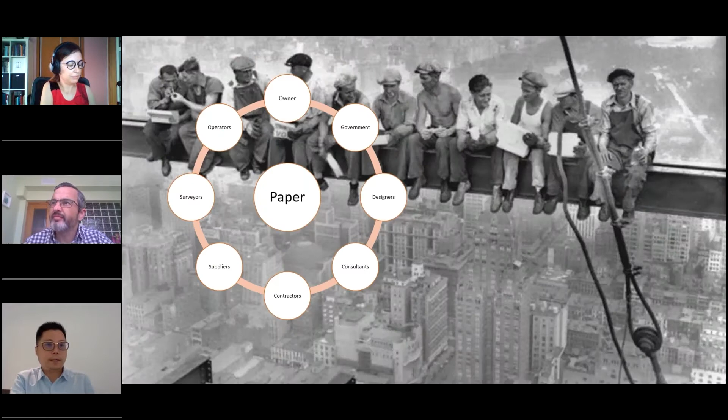This is Wilson from ISBIM, I'm also the BD manager. In the past, in our industry, we also used paper to do everything. So paper caused some projects to be late, with tight schedules and other issues. This problem has persisted for many years.

Now, in these few centuries, the building and construction industry already passed 1.0, and now it's moving towards 4.0, which means everything should be more automated, digitized, and driven by big data. Like other countries, they also do the same things. You can see the chart, many countries already do some BIM jobs, and in Hong Kong the government also encourages BIM for the industry, with workshops for BIM applications.

So for ISBIM, we were established in 2010. We mainly do BIM modeling and consultancy. In 2017, we had an investor, Qcheng Holdings, and also LWK Partners, an architect firm ranked 31st in the world.

In 2018 to 21, we also had some new companies join us. Some drivers developed digital platforms themselves, some work on BIM library, and some on software solutions and RFID, and so on. Our company has many offices around the world and in the Asia Pacific area. We built about 1,000 jobs in the last 10 years, and we have about 30 staff in Hong Kong and worldwide.

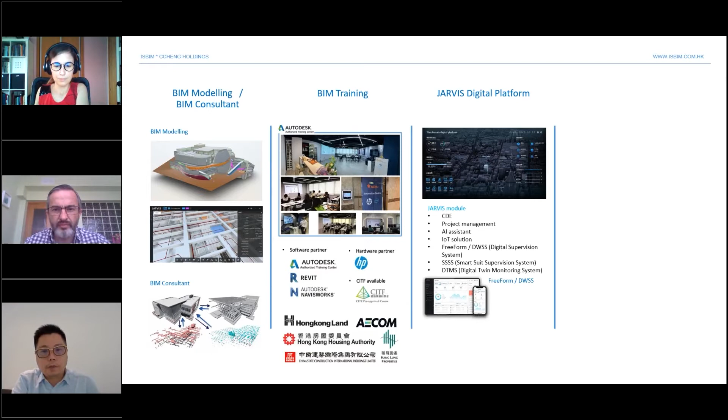It's mainly stuck for some projects like this. This is our platform, and we also have CDE and some applications for others like FreeForm systems and digital twin monitoring systems. Last year, we started to have some robotic solutions, and this application, we also have some robots in the CIC council.

These are some iconic BIM products from our side, you can see some iconic buildings in Hong Kong. We have clients including developers, contractors, subcontractors, and architects. We are also a reseller, besides Autodesk, we are now a reseller for CYPE as well.

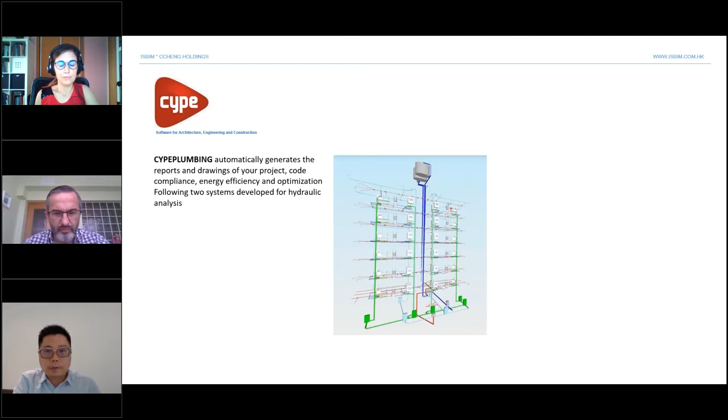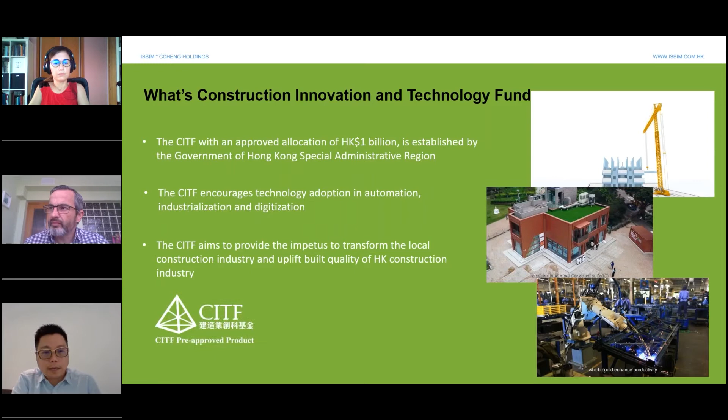The good news, as we informed before, is that if we successfully apply for the CITF funding, applicants can enjoy more benefits. Everybody knows that for CITF, the government encourages industrial technologies with 1 billion in funding. So applicants simply apply, and then they can enjoy the products and also training, with 2 sessions for funding. For the software, the ceiling is about 70% claimable from the CITF fund.

And now for the next step, besides this plumbing system, CYPE also has CYPECAD, which is like Revit, but with 3D capabilities too. It's much better. Next time you can enjoy it, as we are in the process of launching it.

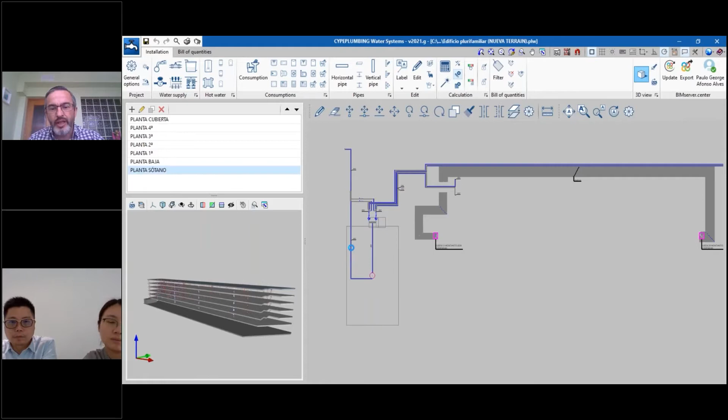Okay, so the program is based on IFC standards, so we can import IFCs from the architecture model from other programs. I see that you are seeing now. Okay, we can, like I was telling, we can import models from IFC Builder, CYPE Architecture.

There are modelers in BIM solutions, and we can establish here the hydraulic systems, like the pumps that we have, the pipes for all the floors, and we can do all the dimensioning using hydraulic calculations, applying standards.

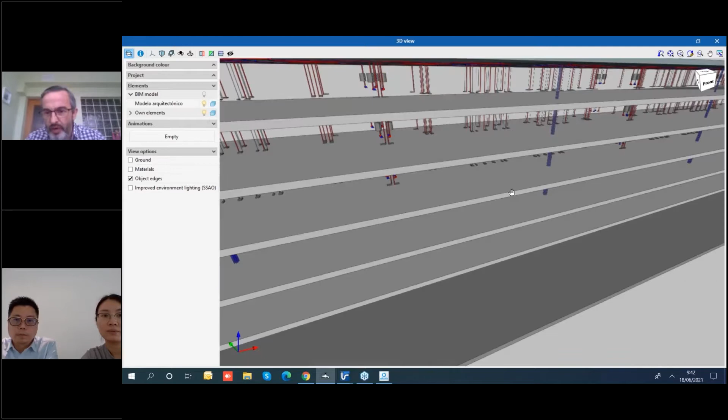In approximately 1 hour, we can see it live, doing a small installation, so you can see live how this works. Okay, so this is water supply. For instance, we can analyze in a quick way the parameters of these installations, and in these big installations we can see if we are making some kind of mistakes.

Okay, let me put here. The program will advise you, will guide you with errors, with warnings, so you can see if you are making some kind of mistakes, to establish a minimum quality that you have to provide to the installation.

The quality, what I mean by quality, is the minimum pressure on the consumptions, velocity, not using higher velocities than the standard indicates. So at every point, the program will advise you, will warn you that we are establishing some kind of problems.

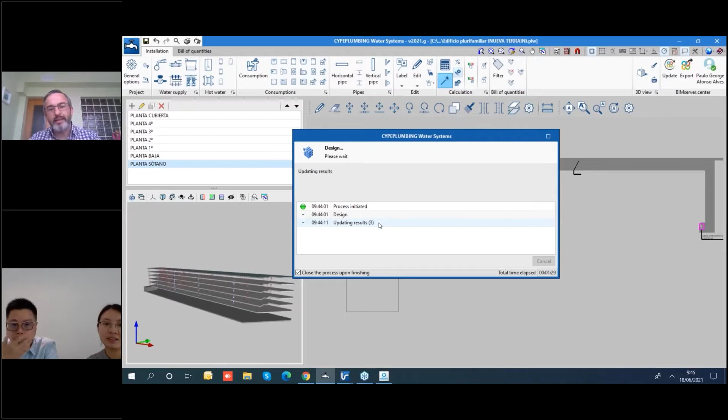So let's see, it's taking a little bit because the program in this case is using iterative calculations. The program will provide the least pressure needed for the pumps. For instance, the program can use a minimum available pressure requirement, minimum diameter. You can establish many kinds of parameters, so you have a good installation.

The program will advise you with warnings and advice if you are making some kind of mistakes. Okay, so for instance, the velocity—let me show you now the 3D installations, so you can see this kind of graphic analysis, not only in 2D, but in 3D you can analyze what parts of our installation have more velocity or the minimum velocity.

In this case, you can analyze a big building in only one view. You can see the parts of the building that maybe we have to check and change, so you can improve the quality of our installations. I'm talking about velocity, but I can also talk about pressure—minimum pressure on the consumptions, the pressure on the pumps.

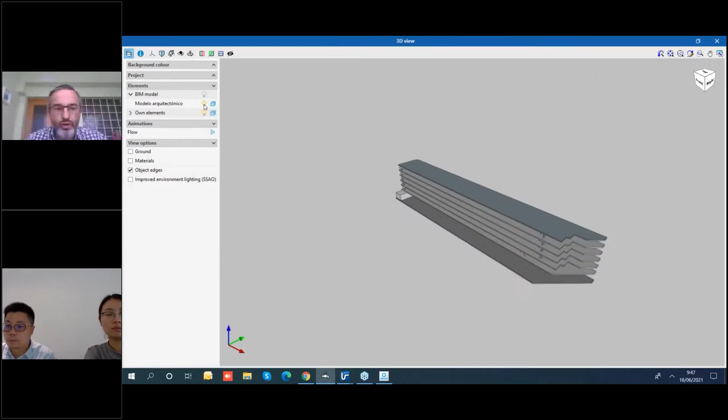All of these parameters are very important, so let me take off the architecture model, and we can establish good quality installations. You see, now here, if you go near, you can see the flow, where it goes, and the velocity—in this case more velocity, less velocity. So in one view, you can see where the problems are in 3D and 2D. Okay, so this is very interesting.

One moment, please. Okay, so this is it.

We would like you to know how we began and what CYPE exactly is, because we have a very interesting story. We started in 1983 as an engineering company doing structural analysis. As we developed bigger and bigger structures, instead of working manually by hand, we started developing computer programs to do our own calculations.

But then, as these programs got quite interesting and we thought they could be useful for other people, we started developing them for a variety of users. Nowadays this is our main activity, developing programs for different calculations. We have more than 140 programs, so you can imagine the wide range of programs we have.

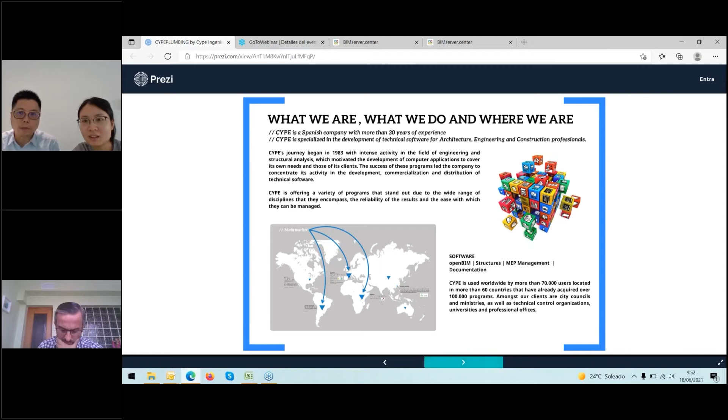Let's start this travel around the world. We started in Spain, as it is our country, and we have developed programs that have been validated for official calculations of thermal analysis. We're very, very proud of that. This has happened in Italy, France, Portugal, and Spain.

These are term programs, programs that use the EnergyPlus engine. Also, we have made an agreement with the most important technical institute of France for acoustics, the CSTB, and in addition, we have developed a Sika software for calculating carbon fiber reinforcements in structures.

In Latin America, we have more than 15,000 clients. It's one of the most used software for structures, building services, and management. There we have more than 20 distributors, and we developed a custom software for Repsol for calculating gas installations.

And also we have landed in the USA. We have presented the CYPETHERM programs, the CYPETHERM suite, and also the structure suite called StruBIM. We were in the USA in 2016, presenting our programs in a variety of congresses, and we even have headquarters in Atlanta.

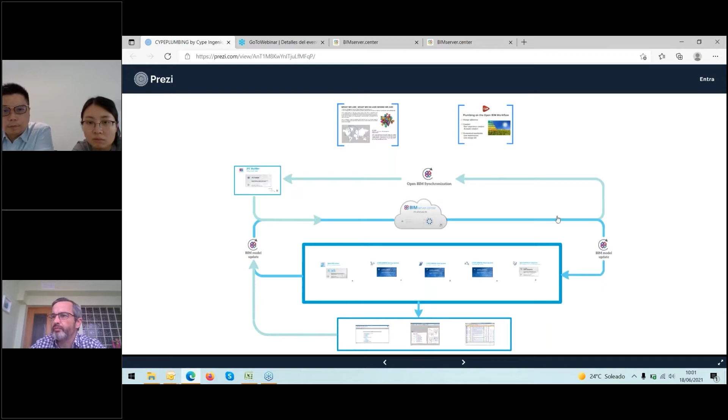Let's go in more detail. Let's talk about the first step, how we make the IFC model.

Actually, there are many ways. These two programs, CYPE Architecture and IFC Builder, are programs that we have developed, are CYPE programs. CYPE Architecture is a modeler in which you can start with the sketch and then make your architectural model, or you can also use templates, but it's thought when you are thinking about the building from the beginning and you want it with a lot of detail.

Then this other program, IFC Builder, this is the program we are going to use today, which is a very, very easy program to use. You can go really fast, especially if you already have the templates, the DWG templates - you can create an architectural model really fast.

Another way in order to start the project could be, if you have a Revit license, you could install the plugin Open BIM Revit and then start the project from Revit. In addition, there is a translator from Archicad to CYPE. And also, if you use other programs and don't have the license, the last option is to upload the IFC with IFC Uploader, and then continue with the rest of the applications.

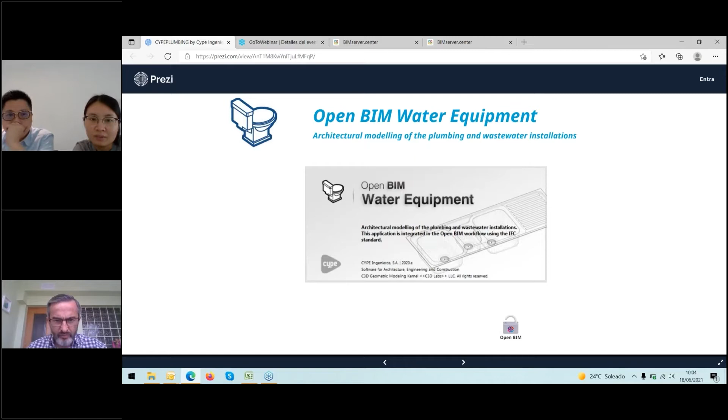Imagine, as I said, you have the architectural model, and then what's the next step? The next step could be to insert the water equipment, the sanitary appliances, with this program, Open BIM Water Equipment - really easy to use. I'll show you later, but it's again in 2D, but gets a 3D, and also you get a list, a report of how many elements you have used.

Then the main programs we are going to talk about today. First of all, Plumbing Water Systems. This is a very powerful program, of course with BIM connection, which means that it's ready to read the IFC, so automatically reads the levels and sees the IFC. So here you only have to create the pipes and the elements of the water installation.

It's very configurable. It has a preset of parameters of different standards, but of course it's editable - you can create your own parameters. So it's helpful because it is not empty at the beginning, but it's very easy to create your own parameters.

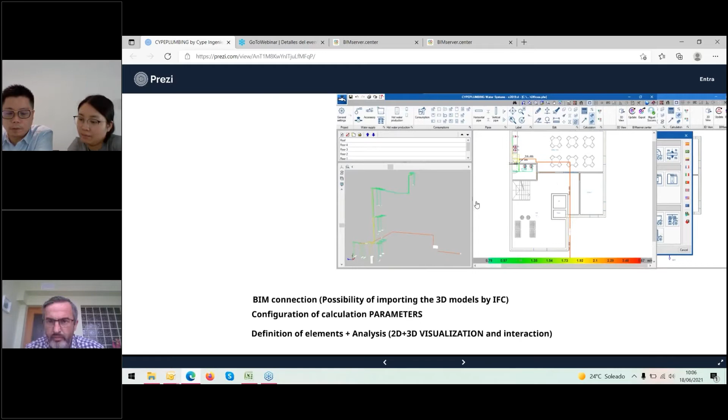In this program you also insert the elements in 2D, but the results are in 3D, and it has a lot of tools for interaction. So, for example, you can see the flow, or after you have calculated - because the program does the hydraulic analysis and determines the flow, pressure, velocity, etc. in every span - you can get a graphical analysis of the results in the 2D and in the 3D. So it helps the designer.

The results, the reports, are very complete and also personalized by the user. Also, you get the plans that you can, of course, print directly or export in different formats from CAD programs.

Okay, let's talk about plumbing solar systems. This program is for the design of solar thermal collection installations. Again, this program is connected with the Open BIM workflow, so it reads the IFC from the programs I said.

You just insert the installations, and of course in the 3D that is very helpful. You can see all the, for example, if you have already created the water systems, you will see it in the 3D. So it's very helpful.

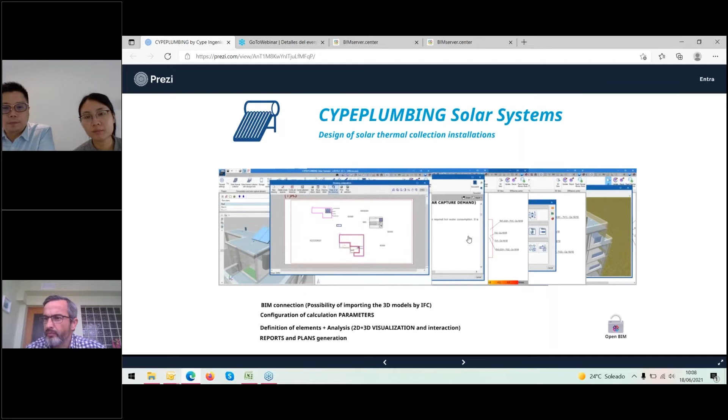Also, it has configured parameters. The user can configure their own, not only the materials, but also the checks that are going to be made. This program has a 2D environment, but generates the 3D, and gets very complete reports and plans that can be printed or exported to different formats.

The other program we are going to talk about is Plumbing Sanitary Systems. This program is aimed to calculate the design of wastewater and rainwater installations connected with the BIM workflow. It has presets of different standards, but allows the user to configure its own criteria.

And of course, creating new discharges, etc. Really, very complete. If you take your time giving information to the program, you will get really, really interesting reports and checks.

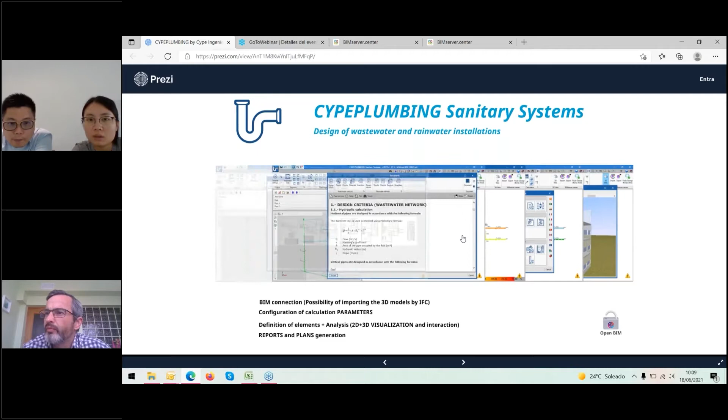And the last program, Open BIM Axis, is, as I said, a vendor's program with which you get with much detail the real pieces of the installations, in this case of this brand. Paulo has already shown this. And that's all the presentation.

Before I move to Paulo, I just would like to show you a little bit an example of what I meant by the architectural model. First of all, I'll open this - just a little example of a file created by CYPE architecture.

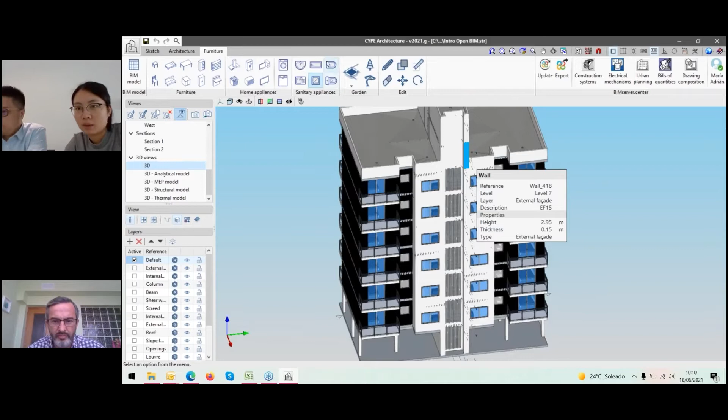In this case, this program has three tabs. You can start with a sketch, then create the architectural model, and then add the furniture, which includes the sanitary appliances. In this floor, we have added the different sanitary appliances.

So these elements will be read by the site planning programs, so they will be exactly in that position, and that saves so much time. I think that's a brief example of this. And for example, with IFC Builder...

This is different, this has a 2D environment. You work directly in plans, but of course you get a 3D view and export an IFC the same way, and you are able to continue with the rest of the programs.

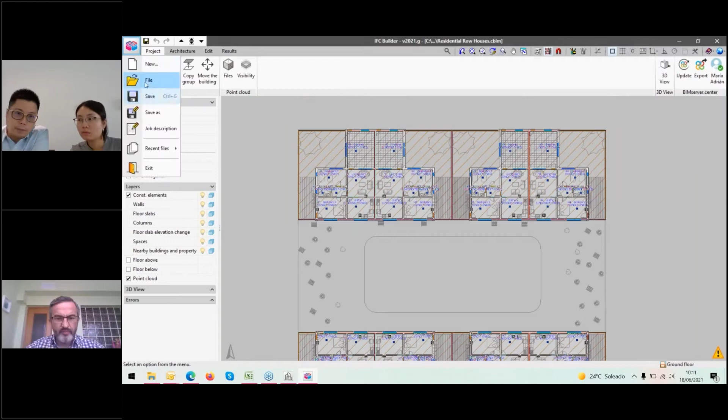Now I'm going to show you a real example of how we are going to, Paulo and I, do a real project, so you see how easy it is and how the workflow works, what we mean by beginning a project and continuing with the rest of applications. Okay, so let's do this.

First of all, I'd like to show you the platform, BIMserver.center. Make sure to choose the right flag you're more comfortable with. And of course, if you have already an account in BIMserver.center, just log in. In case you haven't already logged in, first click in register. Then I'm here in my account.

Let's do a new one. Here I have the projects I have recently participated in, and let's create a new project. Here I give a name to the project - example, let's see, and the date of today.

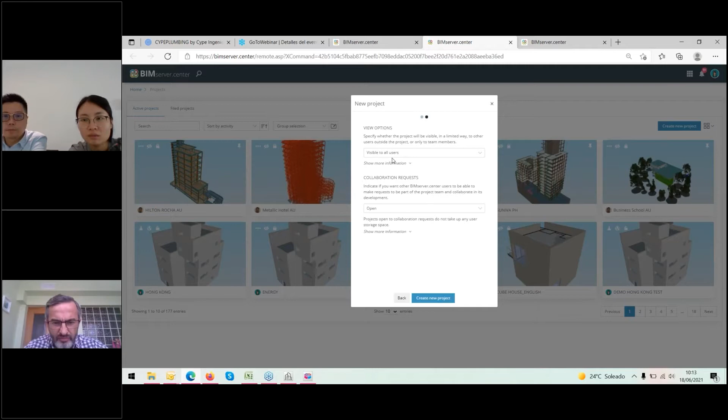And now I have an empty project. Afterwards I'll show you how this is going to be with more information. Now it's empty, and I'm going to invite Paulo to the project. How can I do that? Very easily, I'll go to the work team tab and invite a user.

I have created a group that is called the plumbing team, in which Paulo is, so very easily I include him in the project. I'll give him all the permissions, and I'll ask him to do the wastewater installations.

As I'm going to do this, please complete the plumbing installations. He will receive an email with an invitation to participate in the project. So, okay, let's start with that part. This is done. Another important thing, of course, is having the synchronizer working.

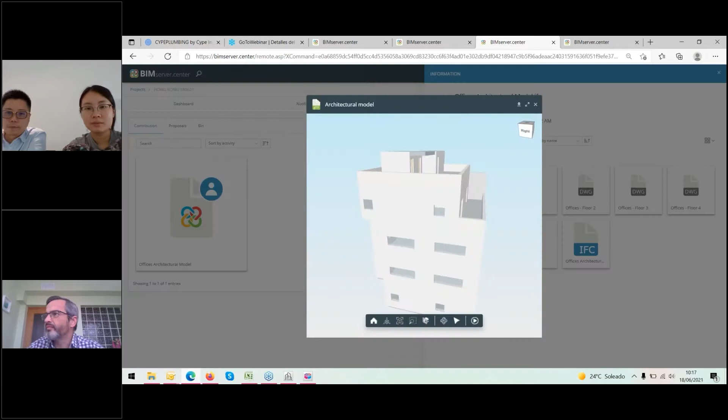So now the one thing you can see here is the architectural model that I have uploaded. So even, for example, something interesting is that I can invite somebody to just see what I have done. For example, in this case Paulo is going to continue, but sometimes you just want to share the results with somebody, etc. This is what I did.

We get the DWG, the IFC, that you can share. I'm going to make you the host, Paulo. Is it okay? Okay, thank you.

Okay, and as he does this. You are seeing my screen? Yes, yes, we can see a 3D view of an installation. Okay, so let me show you here.

This is how I receive his request, his invitation, the invitation. This is Maria. And in the part when we enter BIMserver.center, we have this configuration. So we have project, store, and collaboration requests. The collaboration request — sorry, I have many windows open — so I have to accept it, okay?

I don't know, it's from Maria. Maybe I rejected. No, better. Please accept me. Okay, if you tell me this way, I accept. Okay.

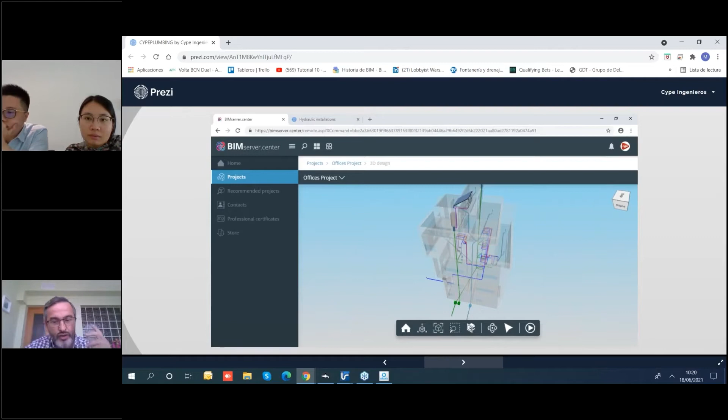The general idea, and I'm going to start where Maria finished her presentation, is that I receive the model, then I export the plumbing installation, in this case water supply, then as you can see the wastewater installation, and then I can add, as you've seen in the presentation, the solar systems, sprinkler systems, gas systems. Then with the help of the many applications on the store, we can convert all this information and do clash detections between the installations and the structure with the architectural model, and we have applications like the model checker, open BIM model checker.

Then we can also have other applications, let me see. Let me put here all the applications. For instance, we have, like you see in the presentation of Maria, the basic plans for the installations, water supply installations and sanitary wastewater plans.

But we can add information to this project, like when we export all the information, we can do the clash detections with the model checker. Let me see where it is. There's open BIM model checker to see the clash detections.

So when you see the workflow on the presentation of Maria, you saw that it's not static. You can go and export again, see the clash detections, go again, until we have everything fixed. So we can have applications to do this, the clash detections, and also other applications to contribute to the plans.

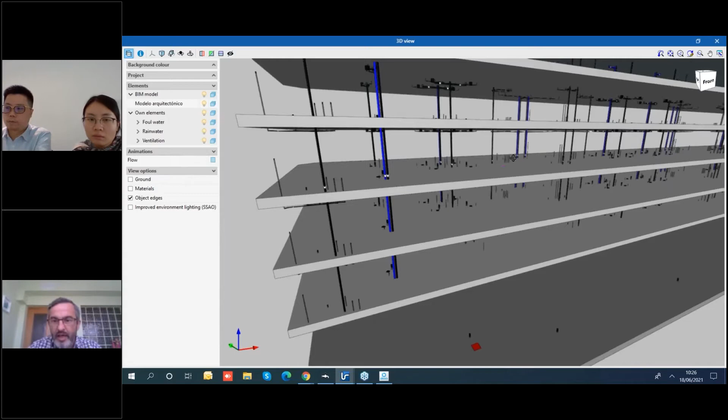You see, this is the installation in the same way. You can see the flow, analyze the installation, and have graphic analysis. Like Maria was telling in her presentation, when you know how to work with one application, the other applications are very similar to use. So you don't have to be afraid. You have to focus on one application, study it, and once you know how to work with it, you can work with the others.

Maybe I can show you where you can find more information. When we enter the store of the BIMserver.center, as I'm saying, in this webinar they are putting the manual information. So when you go here and subscribe yourself to this store...

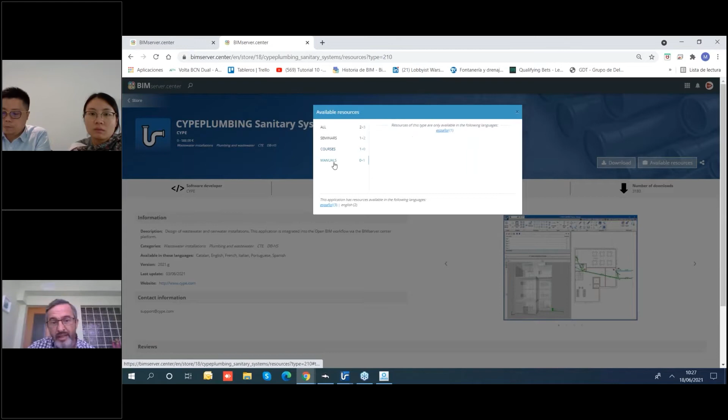I'm seeing the connection is going a little slow, but we can go, for instance, to the CYPE Plumbing Sanitary Systems. We have available resources here, and we have the seminars. Some are in Spanish, and the CYPEPLUMBING tutorial in this case is in English. The manuals in this case are in Spanish, but we have them in other languages too.

Other resources, like I'm showing you, are examples and projects we can open here, and when you open files you have examples that show how it's done, how it's used to create installations. To show you a bigger installation, I already opened it because it's incredibly big.

So here, for instance, is the calculation of a collector for a pipe. You see, it's very big - this case has 25 floors above the ground and 4 floors below ground. You see all the verifications and checks using design tables from the standard and hydraulic analysis. Basically, the standard I'm going to use in the real presentation is a British standard, so you can have an example. You can see that we have all kinds of checks used in each part of the installation. You are going to see.

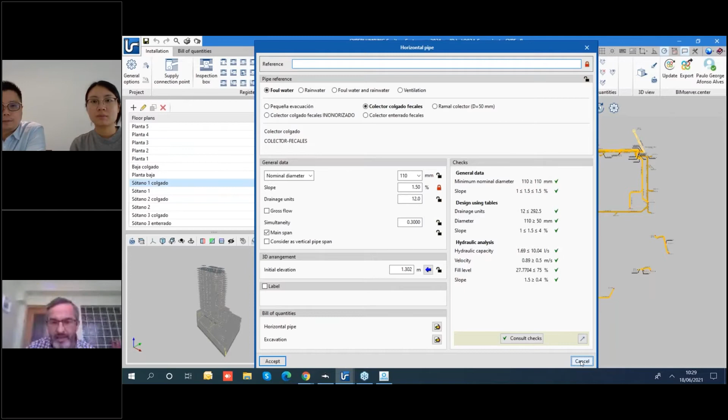Let me show you only the pipes of the building. You see, this is taking a little bit because, like I told you, it's 25 floors, more or less a big building. So it's important that you have good computers, not like mine.

Wait a minute, let's see if it's starting. Let me take off information here so the program can work. I have too many projects open, so let me give more space to this computer so it can have more memory, so I can show you this project.

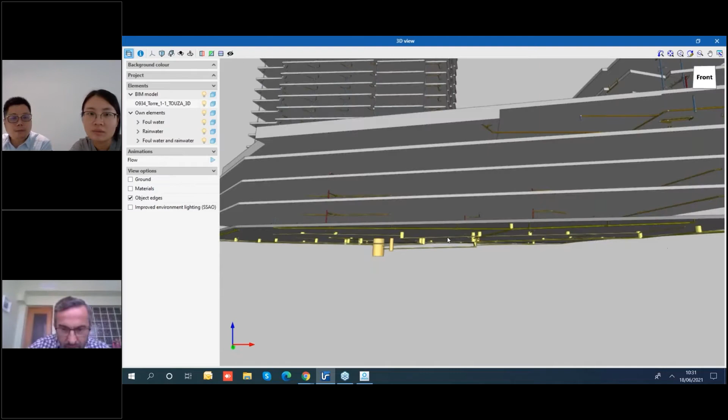You see, this is a big project. There is the buried part of the installation, with the slopes, you know. You can analyze the excavation, all the installation. So you can see how powerful this tool can be.

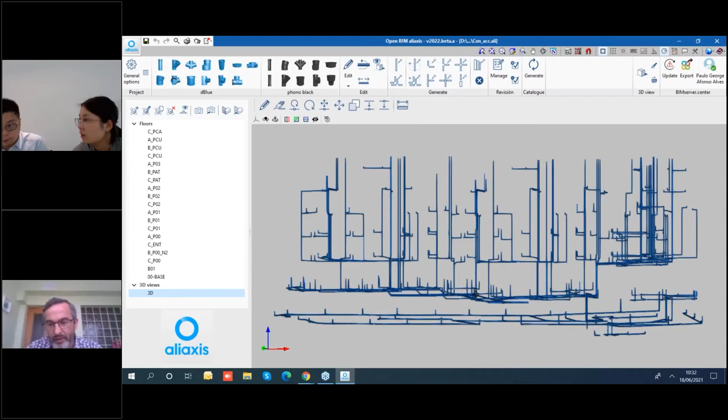We are going to show you a little one, just so you can see it's a live system. This example is one that Maria gave me, just a little example I'm going to do now. This model is from Open BIM Aliaxis, a manufacturer for pipes. If you see now, this is not a project, but a real installation with real pieces. You can have this kind of information all done for the installation, so it could be well done in reality.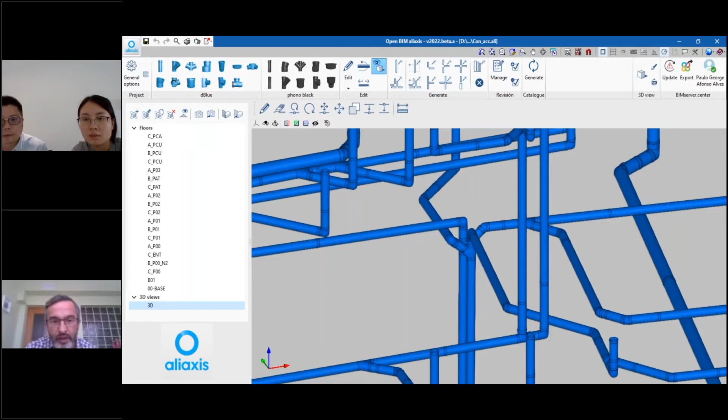So you can take this to the virtual reality for installation, starting from the calculations. In this case I am receiving the pipes calculated from CYPE Plumbing sanitary systems, which is the better workflow, but we can receive in IFC a model calculated and imported into this manufacturer of pipes, and we can change it a little so we can apply this project to the real thing.

Okay, I don't know if I'm explaining myself. I'm seeing that nobody is asking questions. I hope you are understanding. Like I told you, this is being recorded. I hope that you can understand all of this, but this is the real thing.

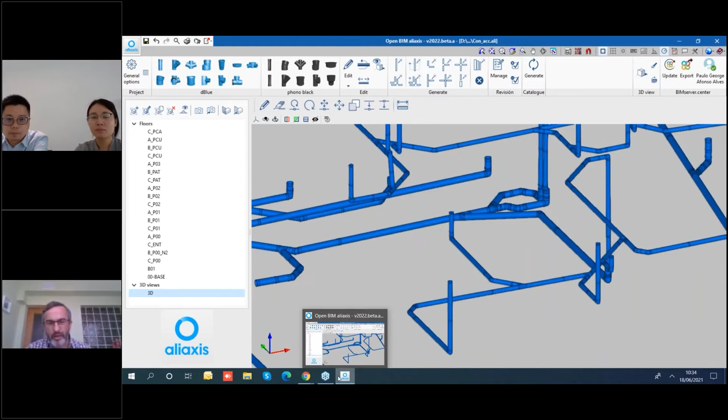So from the projects like you saw before, this in this case is a project for around 40 houses. It's a little project, also more or less small. I'm a civil engineer, and my preoccupation is that the hydraulic system is well dimensioned and works well. So my concern is doing these hydraulic calculations, and to achieve this kind of installation is very easy.

When the model is done, this is automatic, you are not going to take much time to do this. If you do a well done project, maybe 90% of the pieces in the pipes, the real thing, can be done in seconds. Okay, let me show you.

So this is the project that Maria sent me, and I'm starting by using CYPE Plumbing water systems. I'm going to take the information that Maria sent, water systems, and I'm saving this file on my computer. The only thing that communicates the interoperability that I'm making now with Maria is IFC files. So I'm going to select the project.

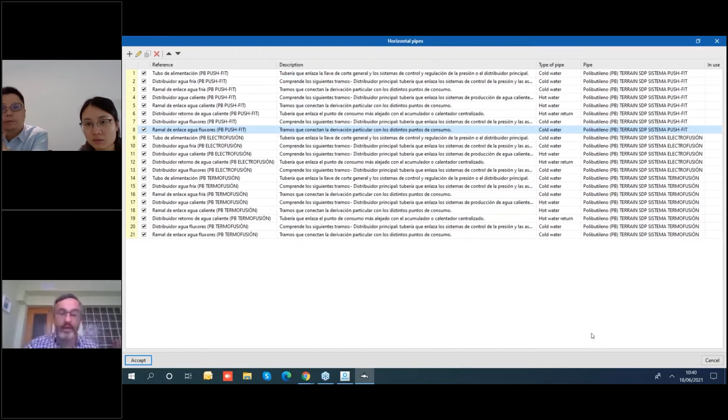So Maria was talking about acoustic problems. If we limit the velocity of these pipes, we are going to have maybe a better installation, better acoustic on our installations. For instance, comfort to achieve this pressure, this minimum pressure on our consumptions. This is comfort for the users.

So the thing is, the whole workflow is based on this, starting with calculations with a graphical program. In the beginning, your concern is to do a well designed installation, to have energy efficiency, comfort, acoustic, and pressure and flow comfort for our users.

And also, like Maria was telling, we can have the bill of quantities and analyze if I can put a bigger pump, or less diameters, and have these considerations. So in this case, we can have all of these calculations with simultaneity, the iterative calculations.

We can work with the temperature of the water and analyze the heat dissipation. All of this we can do to have efficiency, the hot water demand, to dimension the water systems that we have to have. For instance, the storage tanks.

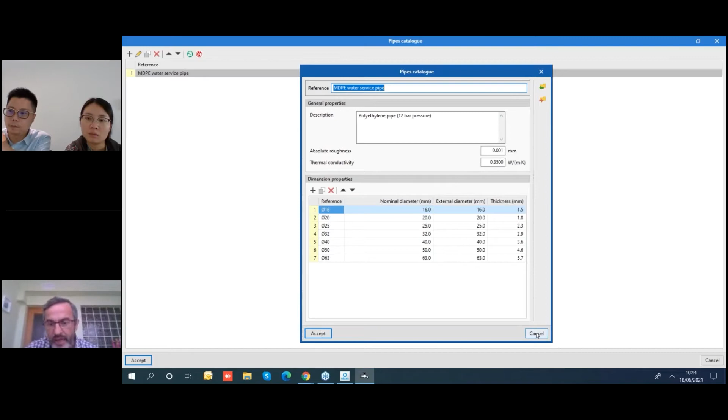Okay, let me use again the personal config. So I have here MDPE water service pipe with this criteria - I use one, but the important thing is in the very beginning, you can use a generic or pre-configuration of British standard or wherever you want, and you can personalize like I did and use a personalized configuration.

Okay, it's very important, you have to do it in all cases. For instance, accessories - in this case I only put stop valves, check valves, but I can put T's, elbows, everything, and analyze T's and elbows and all the accessories independently.

I'm working in the acoustic related field. I want to understand, after the plumbing system is built, how can the layout and data be integrated on CYPESOUND for further acoustic analysis of the plumbing noises?

Thank you for the question. The thing is, in the workflow, when you export the information, you are going to export the pipes, and the pipes will appear there. You can import and see the pipes on your model, and when you start CYPESOUND, you can see where the pipes are going, and you can isolate these parts to be careful, to have this prepared, so we don't have acoustic problems from the pipes to our spaces. So depending where the pipes go, you can see it on CYPESOUND.

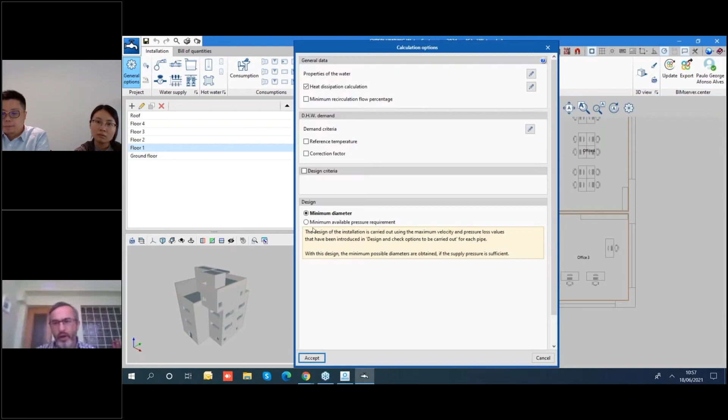You can change it, update it, use it wherever you want to establish the maximum pressure, the maximum velocity, criteria for having more loss of span in the worst cases. So the program will optimize our pumps, our installation, our hydraulic installation. We have here the material and equipment that I advised you to use - you choose the material you have around, configure the technical information, and the program will calculate with your materials and your criteria.

So the program is going from a bigger criteria until you can, like I told you, use a criteria for only part of the houses, and other criteria for the buried part. Okay, let me show you.

When Maria gave me the information, I'm going to update my model information. So I'm receiving data, and you can see how this works with the flow, the workflow.

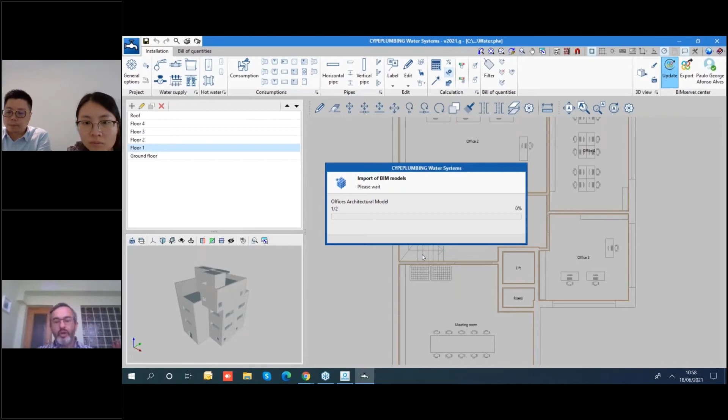So now I have consumption types. Then I stopped here, and I have the next step because I have more information on our project. So the toilets, I'm going to establish that it's not necessary that all the toilets...

Here we establish more or less the ones that I have, but we can then establish that some respond to a criteria and others respond to another criteria of calculation. Like the question, I can have ones with maximum pressure and others with other pressure. For instance, if I use a flush valve, I have to have more minimum pressure. So I have to change the criteria of some, since a flush valve requires a bigger minimum pressure than a normal system.

Wash basin, I'm going to put wash basin, and now I'm establishing from architectural, I'm putting technical conditions to this.

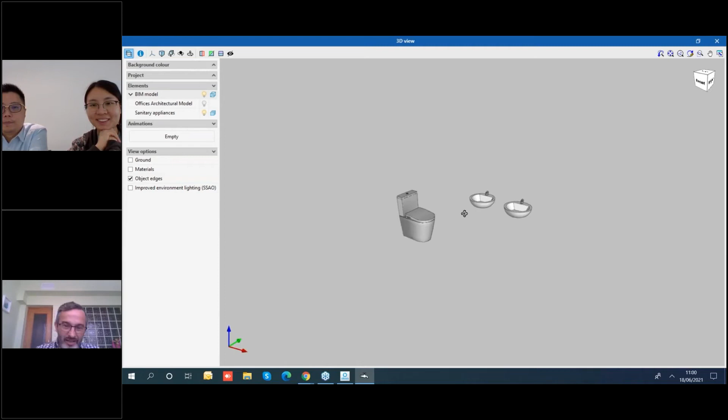You see, now I'm seeing what Maria chose to put. Let me show you here. There it is. Nice, Maria. Nice architectural choice, thank you. He chose good ones. They are beautiful.

But now this is transformed into a criteria. You see this criteria, the one being used for the water system, the program will be able to achieve 10-meter water column as the minimum and maximum here. I established this, and for the wash basin that Maria put, I set all the conditions here.

So you have the design, and I'm preoccupied with the engineer's problems. I have to be careful with the hydromixer that I'm going to use. If I'm using an installation for a hospital, maybe I have to put more pressure or more flow. I don't know, I have to analyze this.

So the program will establish, based on the criteria I'm using, the minimum diameter that this hydromixer has to have. I'm only preoccupied with engineer problems now. Maria with architectural, and me with the more important problems.

I'm sorry to interrupt Paulo, but what could happen, just an example: imagine Paulo tells me the position of the element needs to be different because it will be problematic for the hydraulic installation. So what I can do is change the position of the elements in Open BIM water requirements and export again. This is the flow - I can make changes and then all the programs supplying water systems and sanitary systems will have the new position of the elements.

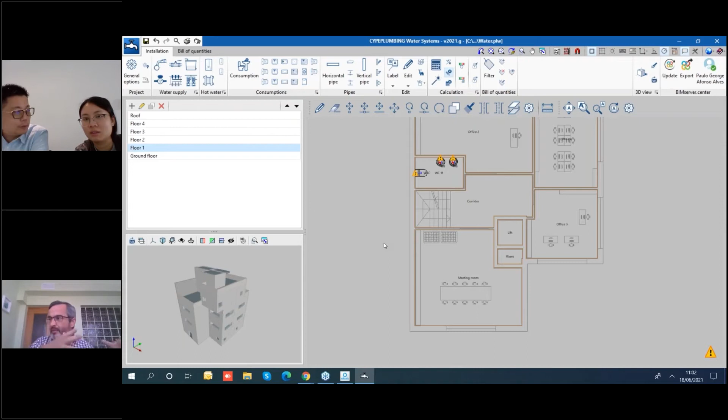It's important because when I work with projects, it's often very usual that the project will have changes at these steps. So it's important that you have this interoperability, so you can work on changes at the right moment and have all the control of the project.

So the real point of the engineering programs that CYPE does is to have a flow. Let me explain, this is very important.

To do a calculation, we can do a basic calculation or a calculation based on what you see. For the program to automatically calculate all the installation, we have to have an initial point - this can be a supply connection or a stop valve that indicates the initial point. This is very important, along with the consumptions as the final point. If you connect the supply connection or stop valve from the initial point to the consumptions...

When we have this consumption only, we can start to do calculations. So the program will calculate the flow, the simultaneity that we have to use, we do sums, or it calculates all the flow, the continuity of the installations. The program will handle all of these concerns.

So the thing is, you see these logs, my advice is you never lock before the program does its calculations. You have to make the installation, make the drawing first - this is the very important concern. You draw a good installation with the minimum courses that you can do. Then the program will calculate these parameters where the log is. For instance, if I don't have a log, the program doesn't know how to calculate these parameters. If you have a log, the program will calculate. So after the program does these calculations, you can lock it, but before that you don't have to lock it.

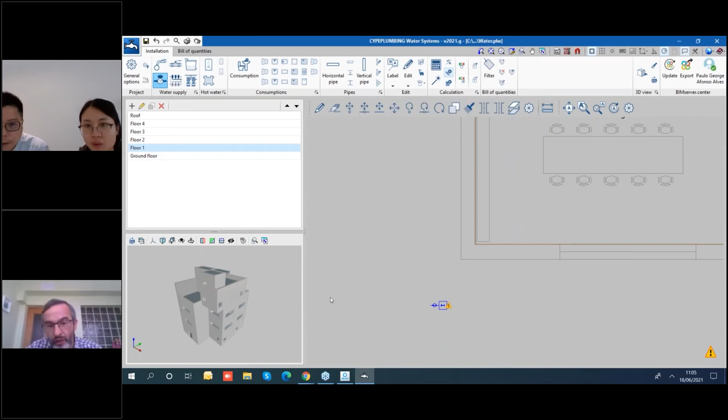I'm putting now, you see my symbology for a supply connection - it can be other kinds of symbology. I am putting a cold water meter. I'm putting in here the flow that is going to go through the pieces, the accessories, so we can study this parameter with the loss of span of this accessory. The program will study it.

Then what can I have? The stop valve, like I told you before, we can have a stop valve for the start of the installation or the end of installation. The important thing is to have the start of the installation well decided and the end of installation well decided. For now, I have the supply connection. I can put a stop valve in here, for instance.

Another important thing is to establish the height of the installation on all the floors. Maybe we have different ways, but I'm going to work with this. For now, I'm going to put the height of the installation at 3 meters. So then I'm going to work more on the installation.

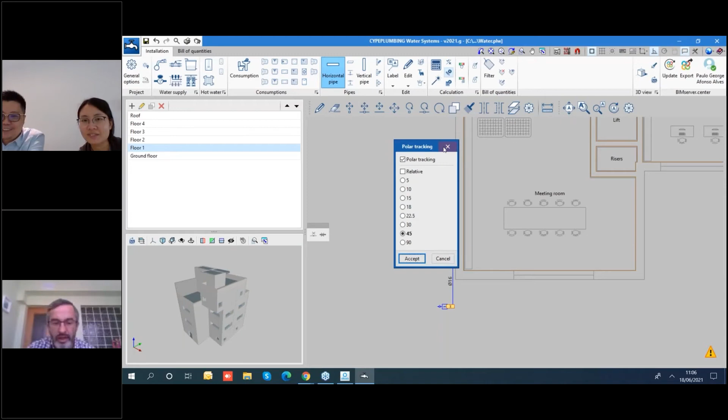For instance, I was told that I'm going to use this criteria for buried pipes. So I'm going to use it here, and now I'm drawing. Now you have ways of doing orthogonality, polar tracking. You have ways of using it like if you are used to CAD solutions - you can use BIM like you are seeing a BIM program with the normal CAD solution drawings. You see, I'm connecting the stop valve, and then I put the criteria for buried pipe. This one is for burial, I established that.

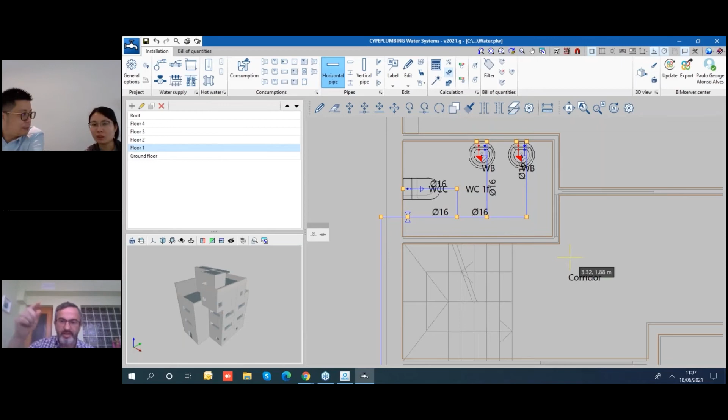And now for inside of my house, I'm going to use another velocity, another criteria for the velocity, so I can have less problems of acoustics and pressure too. If I lower the velocity, I have bigger pipes, so less loss of span. So now I have already put it - this is the easy part, but not so easy because you have to study it. It's very important that we have a design well done so we have less loss of span.

Okay, so I already have the cold water design, so I can calculate, because like I told you, we have an initial part and a final part. So here you see it's warning me. The program can establish the cold water pressure and design. So I need in this installation 15.07 meters water column to have here 10 meters, or 10.14 in this case, or 10 in the worst case, the worst span. You see, the program will put the worst case of span, and here it guides you to the worst case of span to have the minimum pressure where it's needed.

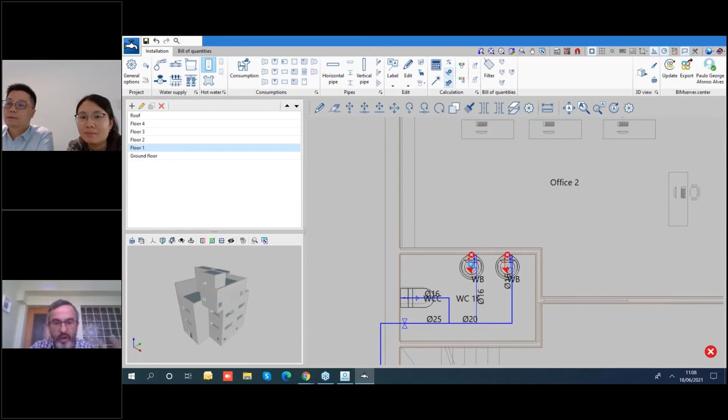So now I have warnings - like I told you, I need a water heater. I need to establish a water heater, so I'm establishing a little one, a normal one. I can establish here the consumption, the demand, the daily volume if I'm going to use a storage one, but I'm going to put one that is an instant water heater, for instance. So I'm going to put it here, and then what do I have to have?

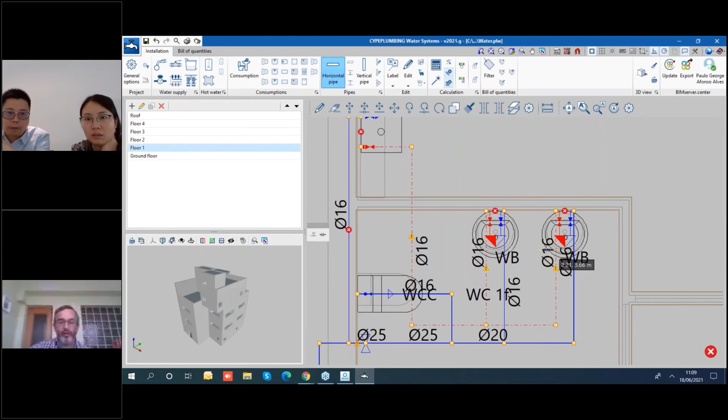So inside of my house, let me put it from here - I have to connect water to them, cold water, and take hot water outside. I'm using it in the first floor, putting in the first floor all of this. This is going to be like in the first floor, where I can have a vertical pipe. The real thing is that on the ground floor we have the supply connection. It's not a problem, because in this way you can see that in the first floor, and maybe in this part of the installation, we have soil.

In the other part, we have no soil. So I can put the water supply wherever it is, whether I have soil or not. If all the floor was in the ground floor, I'd have to put the supply connection on the ground floor, and then take the water up with a vertical pipe to the first floor. In this case, I put all the installation on the first floor, but I'm going to calculate. You see here, it's warning me I don't have the proper water heater for this installation, for the simultaneity that I have.

I fix my problems, and now I need 17.35 meters of water column. Let me see what I did here. Wow, it's worse. It's very bad.

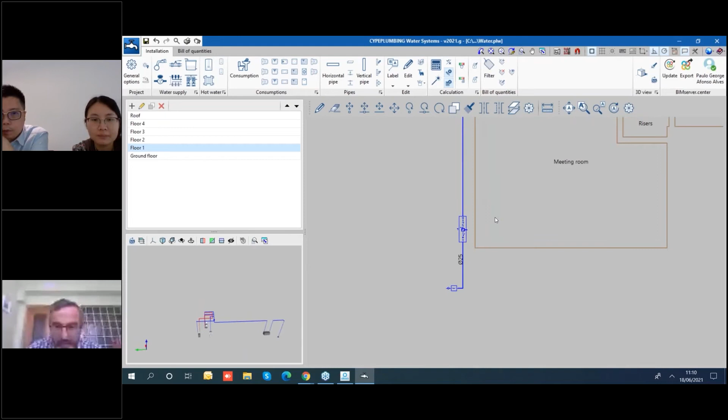Let me show you. Because, like I told you, this part of the installation has to be buried, in the other part it's easy. So now I'm going to check my locks. I'm putting this at 0, so it has to be in the ground. For instance, in this part also in the ground. So now I check and lock my installation. Now I'm going to calculate again, redraw, and here we have the installation.

Like you see, it's a line, but I can put it in. It's important that if you're going to export, take the single file and put the right dimension, the real dimension.

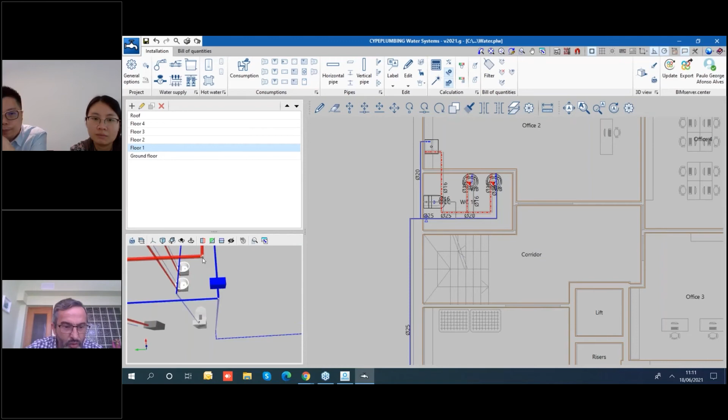For instance, if I put here my original pipe, in this case of hot water, I can establish a thermal insulation, or take it off and study, for instance, in graphic analysis, the insulation thickness, the linear heat flow. You see it's losing only a little bit, but if I take off my insulation, in this case, and calculate again, you see I'm losing a lot more energy. It's a small installation, but I'm losing a lot of energy.

You can see the importance of many things in water supply installation. For instance, like before, we were talking about velocity. So the velocity, you see, I have problems. 2.26 meters. Let me take this off to see it better in single filaments. You see, I have problems there. I don't know why, because I didn't align the water to 1.5 meters.

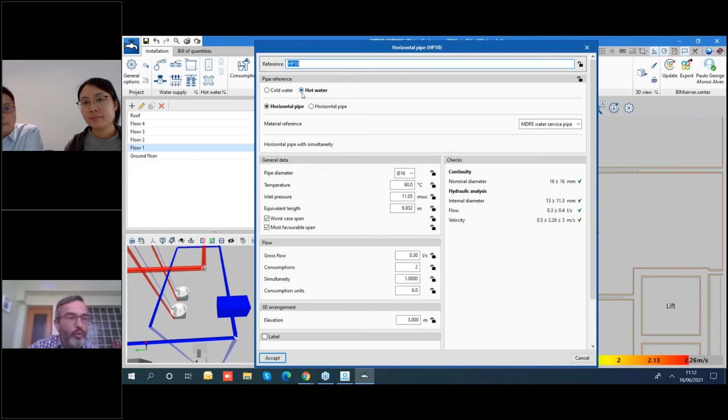So let me go to the water and put, no, 3 meters inside of the house. I don't want it, I want 2 meters. Okay, so let's calculate again. You see, 16 is not enough to establish another velocity. So now I have a maximum of 1.42 meters. You see, on the right, this is a little installation, but in a big installation, you can make this kind of analysis and address these questions.

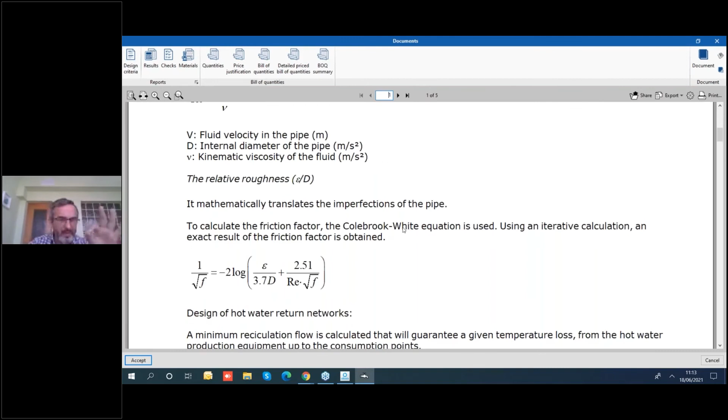So the design criteria, like I told you before, we can analyze. We have Darcy-Weisbach along with Colebrook-White, so we have the best precision calculation, the thermal calculation. We have the dissipated calculation, and we can also have the potential, the power, very powerful, the power of the equipment production, which we can calculate with these norms.

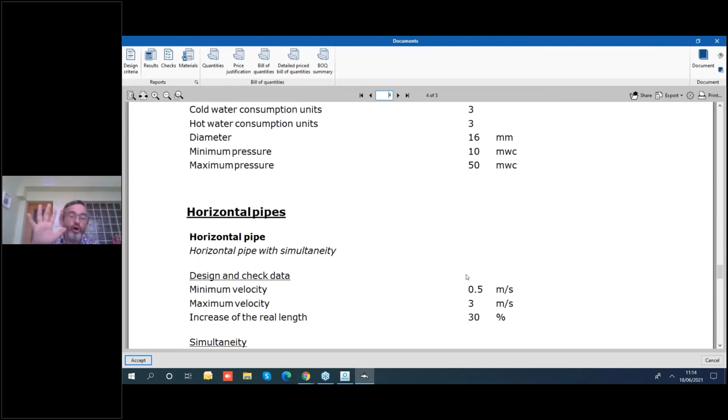We have the simultaneity that we established to use, and this is our project. If you change anything of this, the program situation is what you see is what you get. All of the configurations that you made, all of the text that you put, for instance, I put horizontal pipe houses - this is my rating, this is my criteria. So the criteria that's going to be on the document is going to be what I wrote. So what you configure, what you put on the options, is going to be what you get on the justification of your project.

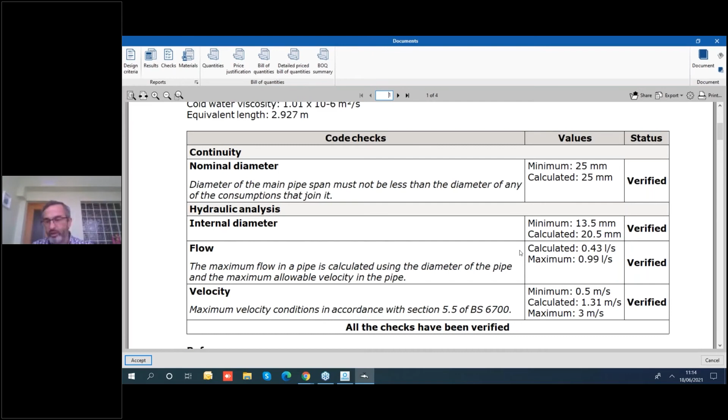You have the results, the checks, you can put, for instance, maximum velocity condition in accordance to 5.5 of British standards. Maybe here I can put - well, I improve in a certain way the maximum velocity at 1.5. You see, this is not according to British standard because it's less than 3 meters, but I can put more text to justify that I want better comfort, less loss of span in my installation.

For instance, the materials that I'm going to use, the quantities - I won't talk about it, but you have here the bill of quantities, and what I only have to do is this one, this, okay? In this case, I have now all the pipes, the bill of quantities, and I can go from here, for instance, there.

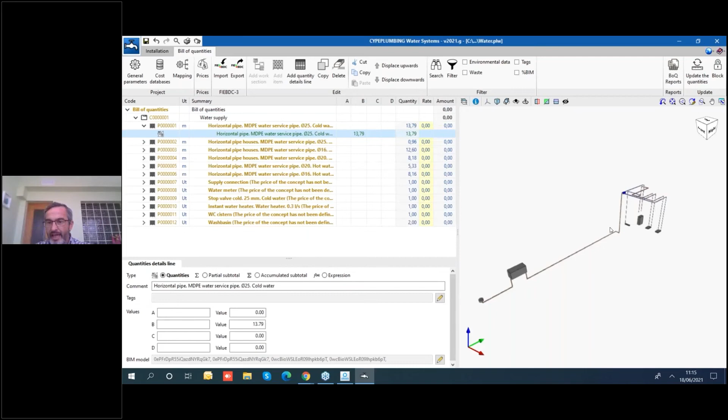You can go to the water equipment, and you can establish prices and have the budget. So it's very easy to use.

In this case, you can have the quantities in your document, and you have the quantities on this project. You can make a document with design, result, checks, materials, quantities, and price.

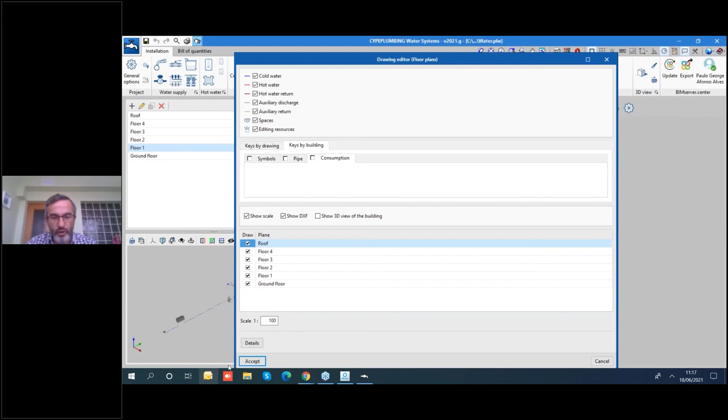I can design the plans and put symbology. I can use CAD buildings or CAD drawings, and have plans very well done. Like I told you, for the first plans, when we export, we can use other programs to achieve better detail on our project.

Now for the dimensioning, it's the same thing - what you see is what you get. If I go in here and take off these dimensions, I can take this from here and show that this is here.

What you see is you're doing the design, making the reports, and making the plans at the same time. You only have to design and draw, and the program will generate the documentation, the justification, and the plans, and you can export this information with all the documents for the project.

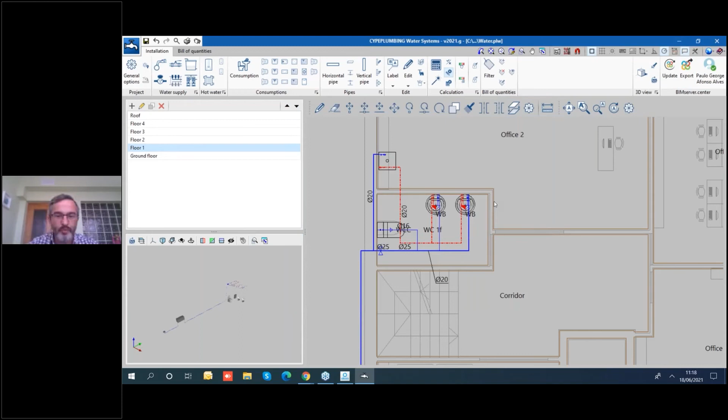We have a few minutes left, so I'm going to show you the wastewater part. It's more or less the same - I'll use a bit more time for this one, but like Maria told you at the very beginning, if you understand the program, you're going to understand the other one too.

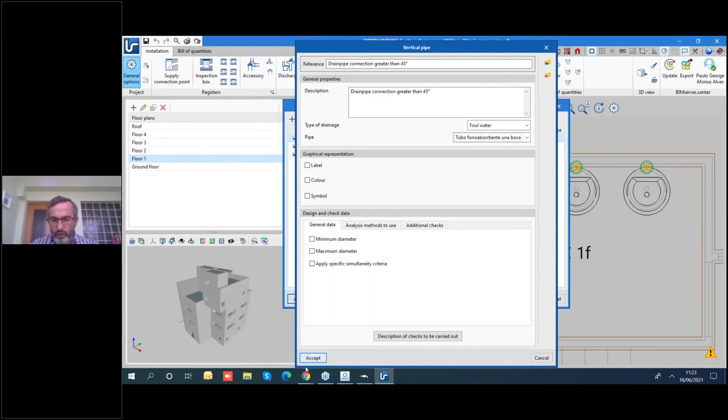And the vertical pipe, let me put this one - it doesn't matter, foul water. You configure this and export your configurations to use in other installations.

Now I'm drawing. You see, I established this material. I don't mind about the diameter because it's going to calculate.

But first of all, I'm putting 110, but I don't lock it - it's only to see it. The program will tell me if it is okay for this installation or not.

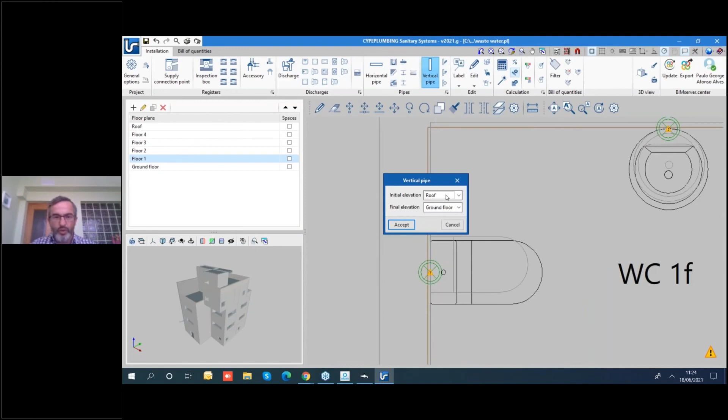So I'm going to put here, more or less, from the roof to the ground floor. Now you're going to see a vertical part of the installation - how can you do it? Now only drawing - you see here, polar tracking at 45 degrees, more or less the pieces that I have in real life, from the manufacturer.

Here, the same thing - you see, I have orthogonal and polar tracking at 45 degrees, and I'm showing you that I have these pipes and accessories in real life.

For instance, here it gives me the installation depth - the first depth, because this is a gravitational installation. So it's going to start at 0.5. I'll put, for instance, 0.35, or 40, and we'll start at 40 and it's going to go down. The program will calculate the slope for the installation and work it out.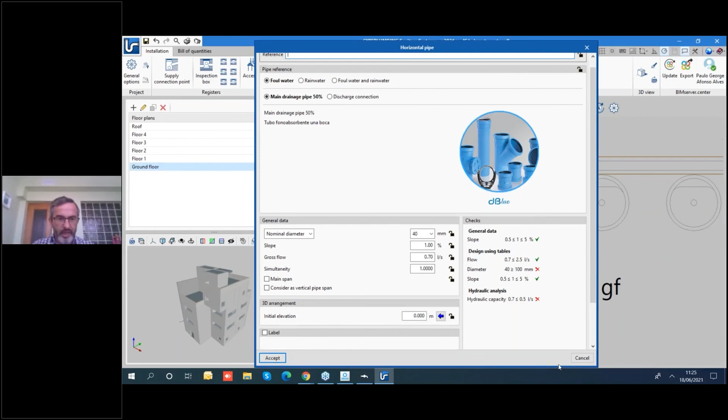Here I'm going to take it to the vertical, and then the ground floor. I'm going to put an inspection box, an intermediate inspection box, and the program will calculate the depth of this too.

In this case, I'm going to put the main drainage pipe. I don't know what criteria I use there - sorry, this is important, it's important that I establish discharge connections. For instance, I made a mistake - it's very easy, let me take this, correct it, and take it to here, and also make a connection. I changed it already, all the pipes to the discharge connection criteria.

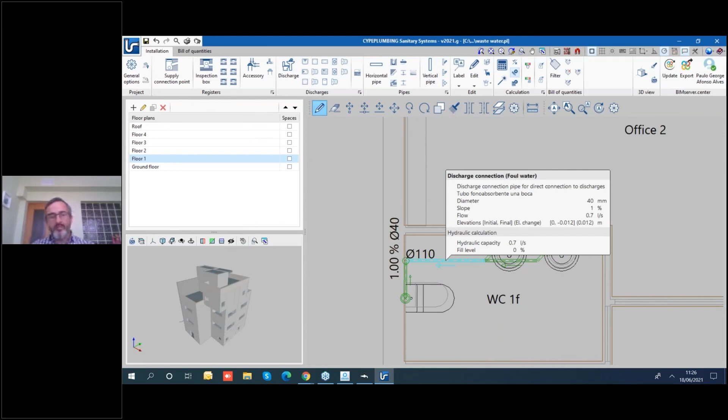There are many more tools - you can automate this. You can put a horizontal pipe - if it is a discharge, it has to be a discharge connection from this discharge. But this is for another seminar, another day, because it's a lot of information. To start using it, this is the necessary information.

So for instance, what we also need is the same - you have to have the supply connection point, whatever supply connection it is, and the discharge. In this case, the discharge is the first point, and the supply connection on the street is the end point.

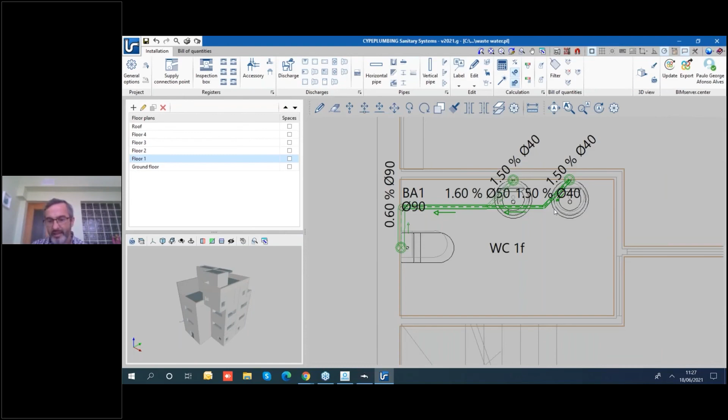So it's very important, so the program can calculate the whole tree of the installation from the beginning till the end, and it's going to calculate the flows and everything. The minimum diameters are calculated - in this case it's very easy. The hydraulic analysis is calculated already - I always remember, what you see is what you get.

I can take off information that is not needed here, I can take this from there, and I can put the vertical pipe indicated there. So on the ground floor I already have, you see? Let me take this off to there, for instance, and analyze what is happening - this is the important thing.

We are using the standard hydraulic analysis, applying real pipes. Let me show you the bill of quantities. I can delete and create, importing all the bill of quantities wherever needed. Here's the wash basin discharge connection - the discharge is 3.70 meters of this kind.

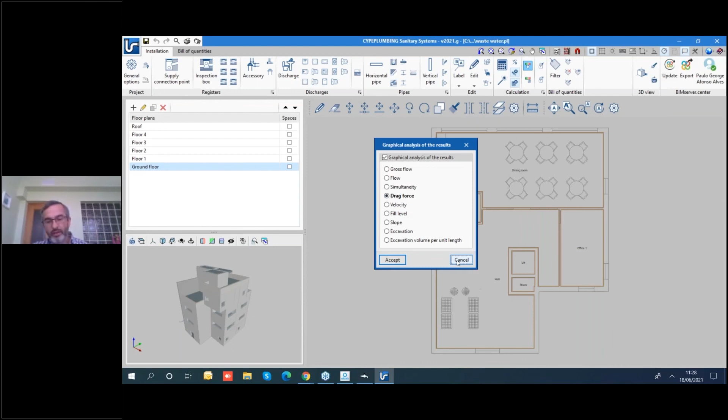We have the hydraulic analysis too, for flow, simultaneity, and drag force if needed, especially if you're using very low slopes - it's important to calculate drag force. To use drag force, you just have to activate all of this on hydraulic analysis.

I have to set minimum drag force to 1 Pascal. If you have a big project and need to excavate as little as possible, you can use this kind of check. If the drag force result is okay, you have auto-cleaning installation, for instance.

The program is very powerful in this case. You can use the fill level here, for example. It's important that, as I showed you, the norm's maximum criteria is 50%, so the program establishes 50% as the maximum.

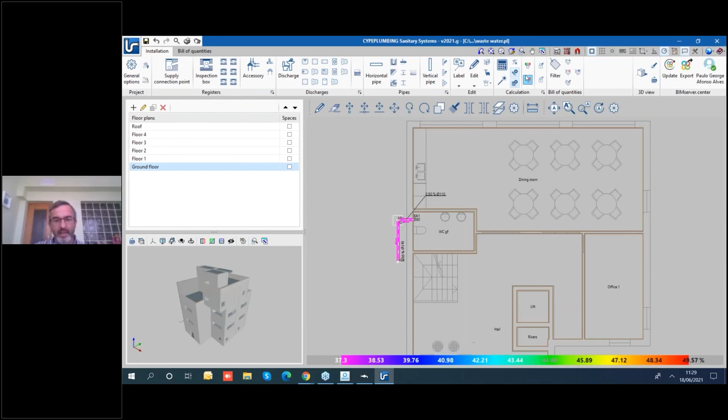In this simple example it's easy, but in bigger cases, like a 25 floor tower, you can use this too, and you can see it applied in all the elements.

Repeating myself: the criteria is what you see is what you get - the results, the checks.

You can separate wastewater from rainwater. For instance, in all of Europe, more or less, the European norm makes it obligatory to separate rainwater from wastewater. Also, within wastewater, you can have gray water and black water - you can separate many kinds of water, okay?

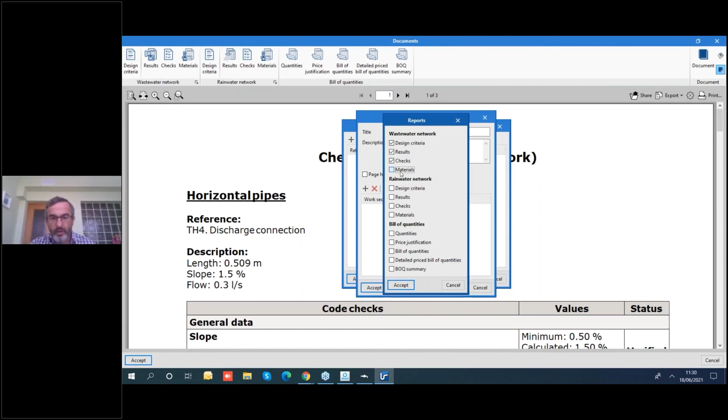So here you can make your own documentation. In this case, I only have wastewater quantities, and I can generate the document with this index and all the justification to produce a proper project.

The same applies for the plans - you have a lot of information. We also have a scheme of the vertical pipes, showing from where to where the vertical pipes run. You have a lot of information here.

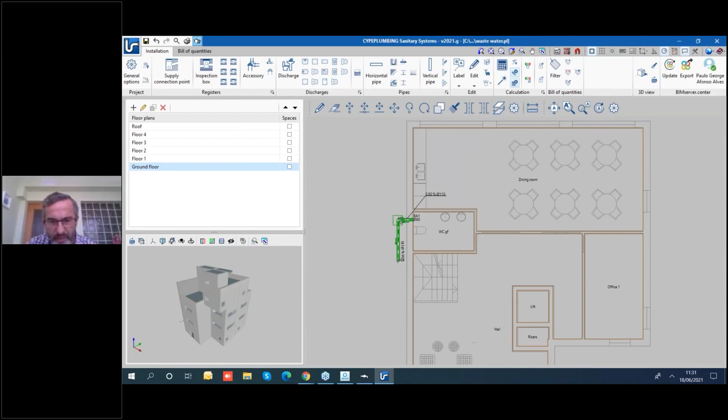Don't worry too much about the organization, it's just the first pass. We can move it, edit it, export a DWG file and work it out further. You can make drawings in other formats like DIN A or ANSI, wherever needed - you can configure and personalize the whole program.

In this case, I export my wastewater installation. I'm passing the time now, but it's only to show that we can convert this into a real project in Open BIM Aliaxis - converting these flow calculations into real pieces and real accessories, okay?

Let me see one moment if I can do it. I'm having problems, I think, with my internet - my connection isn't valid. I'm having trouble right at the end here, having problems uploading the information.

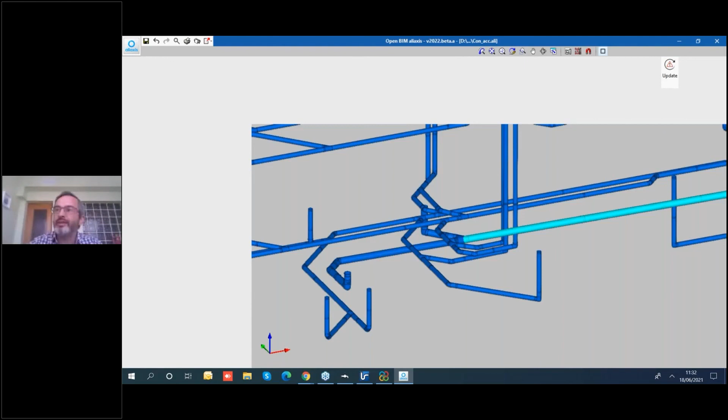So the thing is, take away the general idea of what we can do with these programs, how powerful they are - you can start easy and build up installations. Let me see... no, I cannot do it. Sorry, let me see if I can restart the program, but we are running out of time.

I'm so sorry, I wanted you to see all the steps in the live session, but I'm having problems with my connection. Let me see if I can start again and recover it.

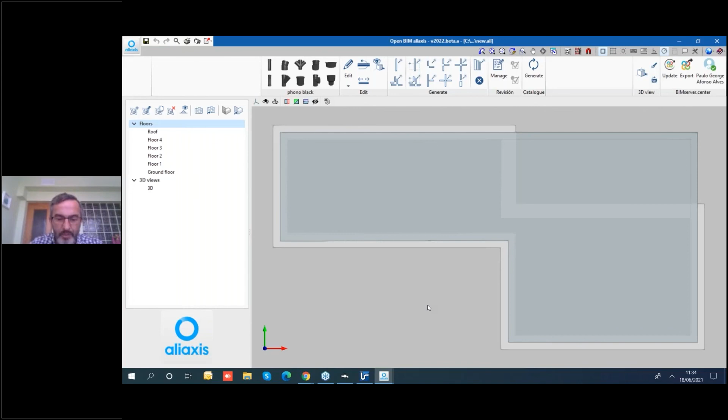And so in the 3D, I have here the architectural model and the pipes. These pipes are the ones that come from the project. So in one click, I can convert this model from the project from being only a pipe to a real catalog.

So I changed it here, sorry, let me take that off. I change it, it's very easy. I can go again at the pipe and convert only this pipe now to this kind. It's very easy. And now I can create the accessories.

The elbows, the tees, will be created. Here, for instance, I cannot create it, but it's very easy. For instance, I go there in the project and I see that there's a change of diameters. If I apply a point here and establish that it's the same diameter, 50 for instance, now I can block it because it's accomplished, okay? You see, I'm accomplished.

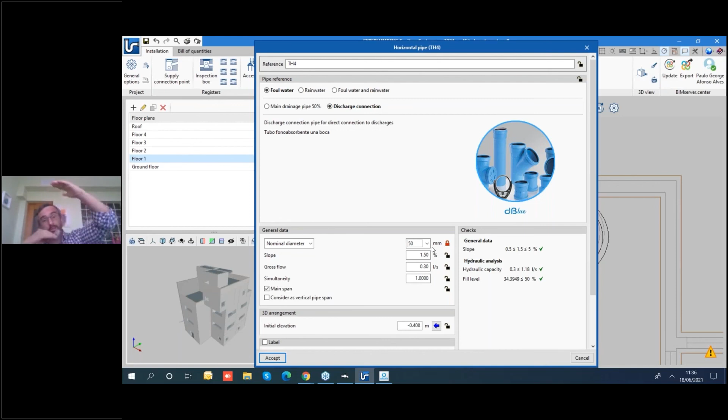The program will give you the first solution and the better solution to have minimum slope for your installation, because the slope is important for excavation and for the minimum free height on your floor.

So I calculate again, I export again. Let me see if I don't have many problems with the internet connection. And it's going to upload it. Okay, so I have a new configuration.

And here you see the program tells me, oops, there is a change on our solution. And there's a change, so I'm going to import again with the changes, okay? In the workflow, it's very easy.

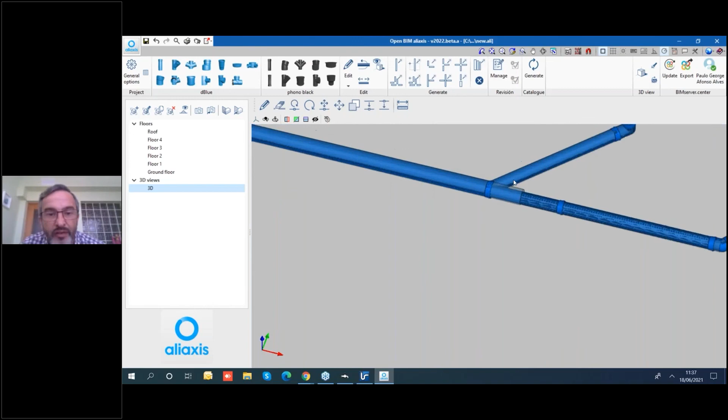The important thing for me is I can change it on the project where the calculations are, so I can assure that the criteria is well done. You see, the program now is different there. So I can...

Erase all the pipes again and rearrange these to have new pipes, you know, and now I have a new pipe there. Okay, for instance.

Exactly. Paulo, sorry to interrupt. Just a little comment — as he is doing this, I'm getting the wastewater installation project also in my account. If I check my project, I see everything he's done. All the files he exported are in my project also. Okay, so this is important. You can manage it, you can review all the installation to have all in account.

You can fix it all, and in one click you're going to see the elbows, the T's. For instance, there's a reduction eccentric increaser. In this case there's a T, a real T. Elbow with 45 degrees that I use on the project, with the real slope that I applied to achieve the hydraulic conditions.

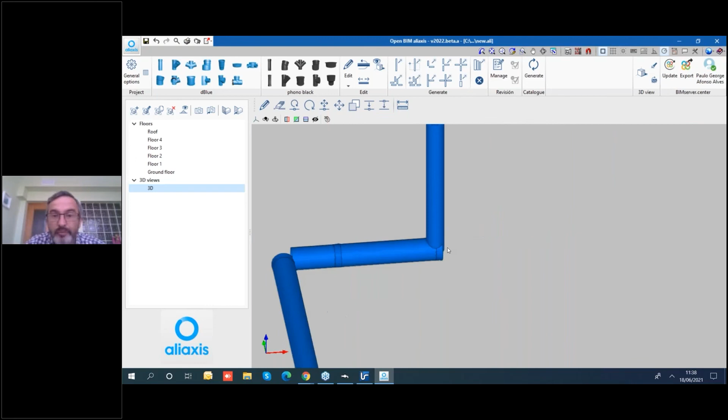Okay, so I have it all here. I can see if it is... you see, this is not okay. Why? Because there is no elbow with 90 millimeters that goes to 110 millimeters. So I have to work it out, or I have to go into the project, change the diameter, and so on.